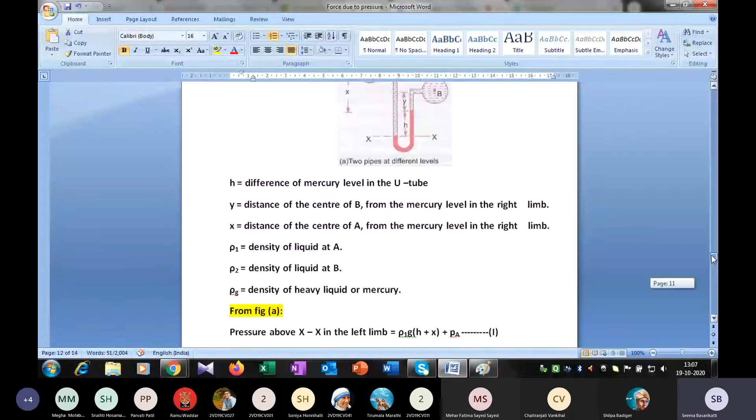This is the inverted U-tube manometer, the second type of differential manometer. In the U-tube differential manometer, it was somewhat like this, but in case of an inverted U-tube manometer, you can see the pipe will be in the inverted direction.

So these are the 2 points, point A and B. Here, in spite of a regular U-tube, it is an inverted U-tube. There is a point A and point B, and these are 2 vertical pipes connected to these points. The left pipe is connected to point A where you need to identify the pressure, and another pipe is connected to point B where you need to identify the pressure. This is an example of an inverted U-tube differential manometer.

In this case, there will be either two types of liquids or a combination of 3 liquids. The first liquid will be filled in the left limb, and again it is a combination of a heavy liquid and a light liquid. As you know, mercury is considered a heavy liquid. In almost all manometers, mercury is filled because its specific gravity is 13.6 and its density is 13,600, so compared to all liquids, mercury is considered the heavy liquid. So in this manometer, to identify the pressure, the liquid should be a combination of a light liquid and a heavy liquid.

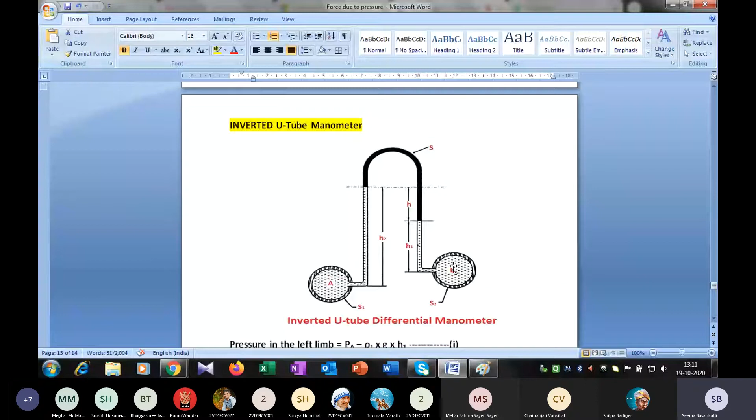For 3 types of liquid, let's consider water present in the left limb, in contact with mercury, and in the right limb it consists of oil. Suppose you wanted to identify the pressure of the oil and the pressure of the water - in this example, 3 types of liquids are present. So in the differential manometer, it contains either 2 types of liquid or 3 types of liquid.

In this condition, I am going to derive the equation. Let me consider the pressure in the left limb - I need to identify what is the pressure at the left limb, and the difference in pressure at A and B that I need to identify. Usually when we derive the equation, we start with point A, so I am going to take it as point A, PA, pressure at A.

While deriving the equation for the differential U-tube manometer, I take the positive direction. So if it is a U-tube differential manometer, then PA plus rho1 g h1, next PB plus rho2 g y.

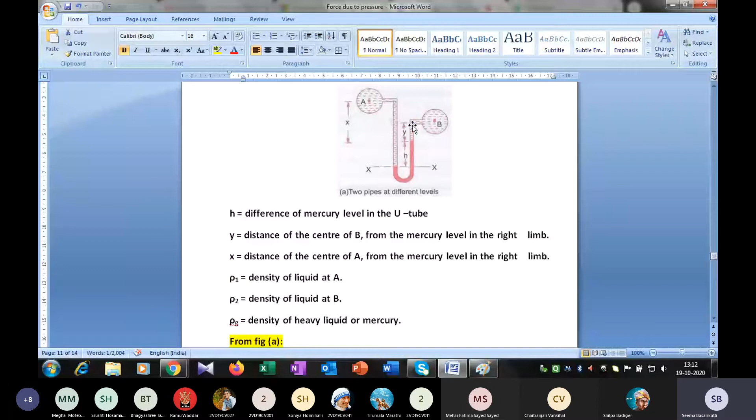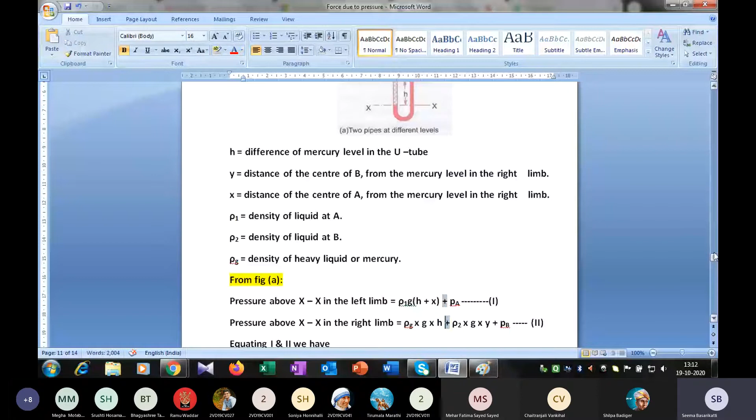This is the derivation which we have done in the previous lecture, where we used to take a positive sign. For a U-tube differential manometer, we need to take a positive sign. For an inverted U-tube manometer, we need to take a negative. That is the only difference between a U-tube differential manometer and an inverted U-tube manometer.

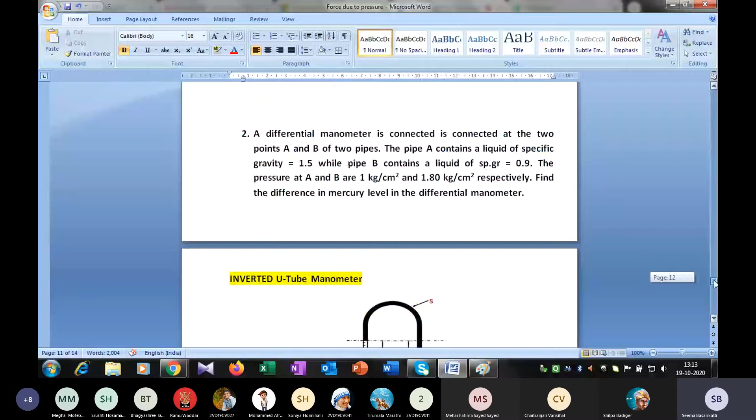In order to identify the pressure in the left limb, I am going to write the equation as PA, that is pressure at A, minus. Why minus? Because it is an inverted U-tube differential manometer. This is the first liquid I have taken, so rho 1 G, it should become H1. There is a mistake here, so while drawing, write this as H1 and take this as H2, and the rest remains the same. So PA minus rho 1 G H1, that is the height of the liquid up to the datum. I am going to take this as equation 1.

Next, forget about the left limb, concentrate only on the right limb. In order to make it easy, I am going to start again with PB. So this is PB minus, I can take this, that is rho G into H minus rho 2 into G into H2. This equation I am going to take as equation 2.

So in this case it is PA minus this, and in this case PB minus this. Either you can take this here if it's confusing, I can take this equation here: PB is in contact with rho 2 GH2 and then minus rho G into H. Only thing is, wherever there is a positive sign, you need to take negative for an inverted U-tube manometer. Now, this is equation 1 for the left limb and equation 2 for the right limb.

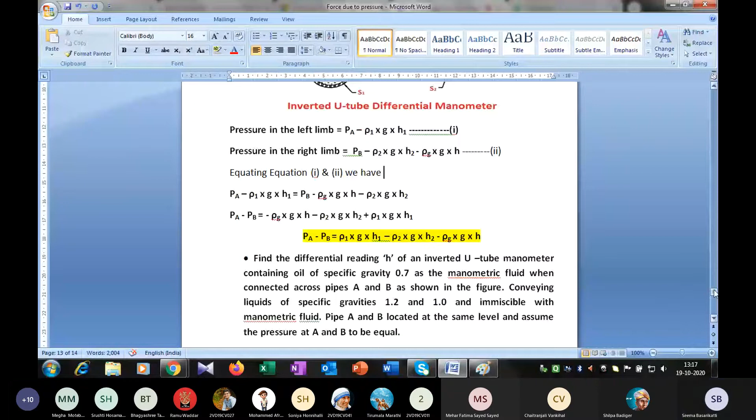In this particular diagram, make a slight change. Instead of taking H2, make it H1, and this one H2. Rest of the things are same.

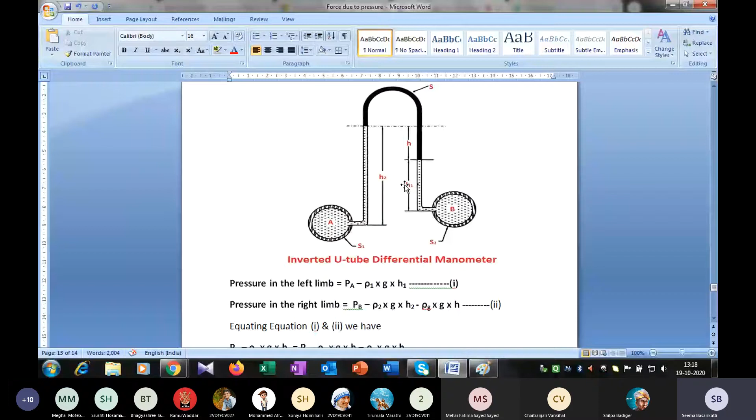Have you taken the equation? Okay, shall we solve a problem? Okay, take this problem.

Find the differential reading H of an inverted U-tube manometer. Whenever you are solving the problem, make sure whether it is a simple manometer, a differential manometer, or an inverted U-tube manometer.

Containing oil of specific gravity 0.7 as the manometric fluid, connected across pipes A and B, conveying liquids of specific gravities 1.2 and 1, immiscible with the manometric fluid. Pipe A and B are located at the same level, and assume the pressure at A and B to be equal.

So it is an example of an inverted U-tube manometer. It consists of three types of liquid, each having a specific gravity - 0.7, 1.2, and 1. And here they have given that pipe A and B are at the same level.

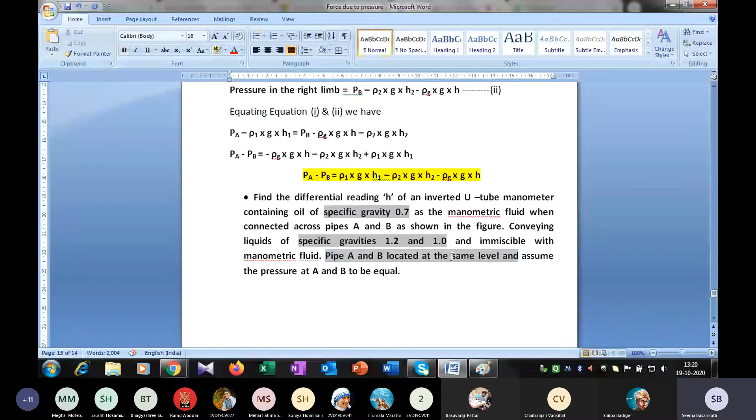So what does it indicate? Pipe A and B located at the same level - it is an example of this case, but the thing is that it is inverted.

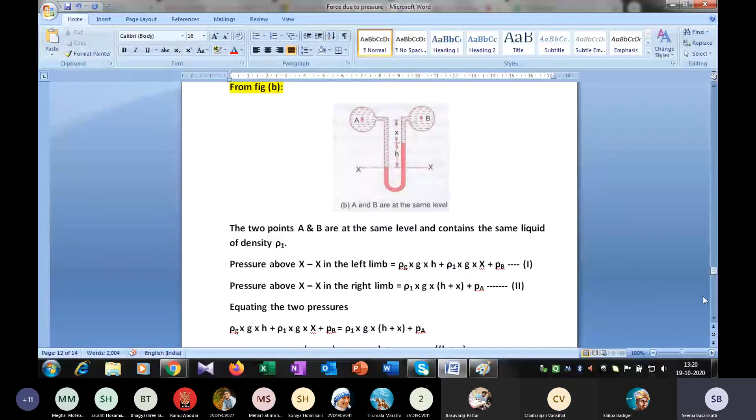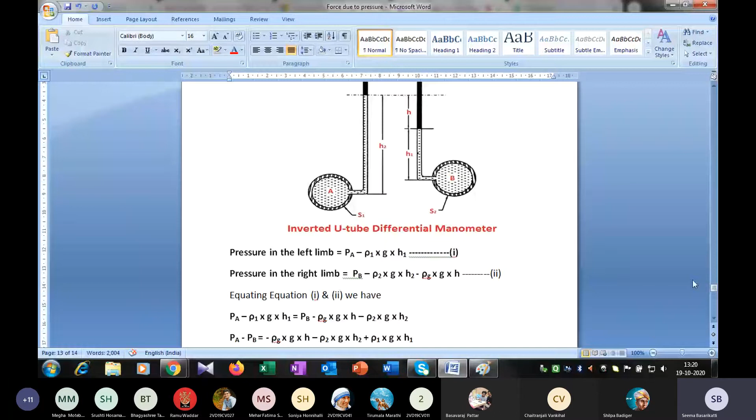If it is inverted and both points are at the same level, what will be the difference? I said that if these two limbs are at different levels, then there is a difference of this much. If they are at the same level, what will be the difference? If these two points are at the same level, it will be same.

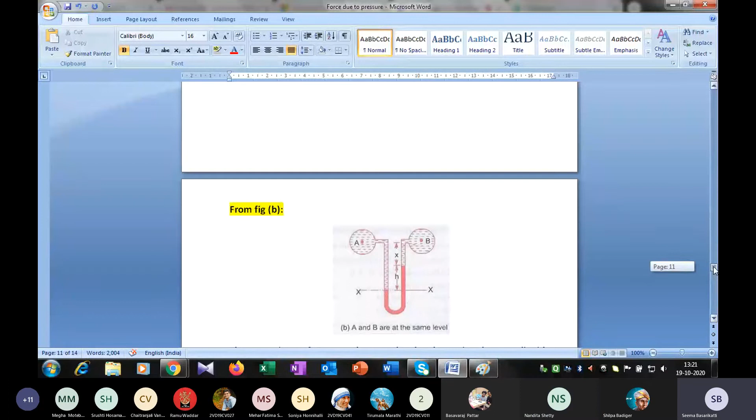That is, PA will be equal to PB. So that is the thing they have given here - assume the pressure at A and B to be equal.

Have you taken the problem? Yes. Take this diagram, the first diagram.

Here I can see point A and B are at the same level. This is the liquid with specific gravity 1.2, this is the second liquid with specific gravity 0.7, and this is the third liquid with specific gravity 1. So three liquids with three different specific gravities.

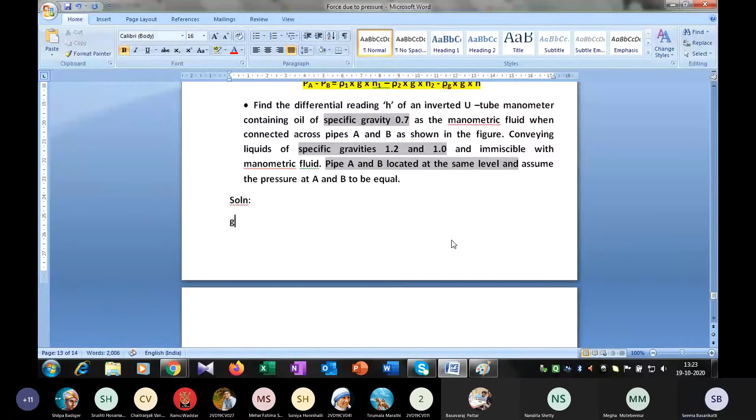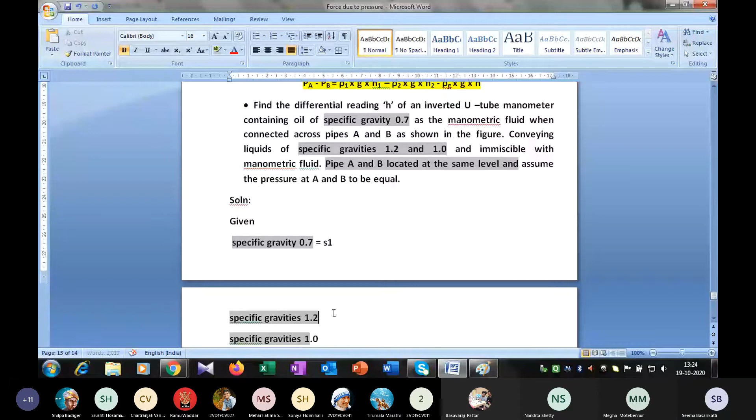Here they have given the specific gravity of the first liquid. Let me take this - write the specific gravity of all the liquids. So this is the specific gravity, let me take it as S1. And this is S2. And this is S3.

So if the specific gravity of a point is 0.7, then what will be the density? Density will be equal to 1000 into specific gravity. So ρ1 will be 1000 into 0.7, which will be equal to 700. Am I right?

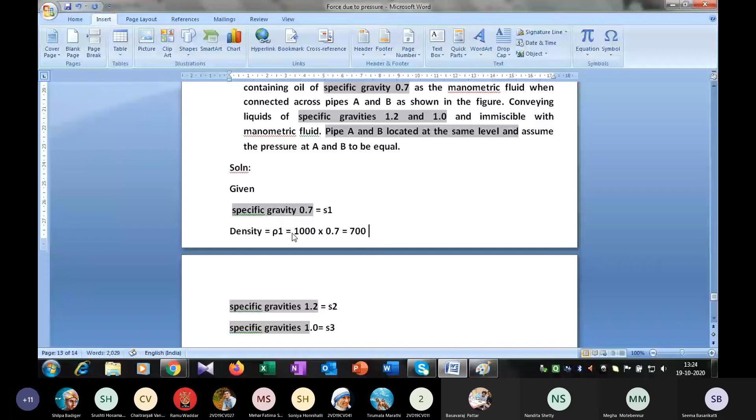Yes, ma'am. What is the unit? Kg per meter cube. Okay, simultaneously I am going to take this as ρ2.

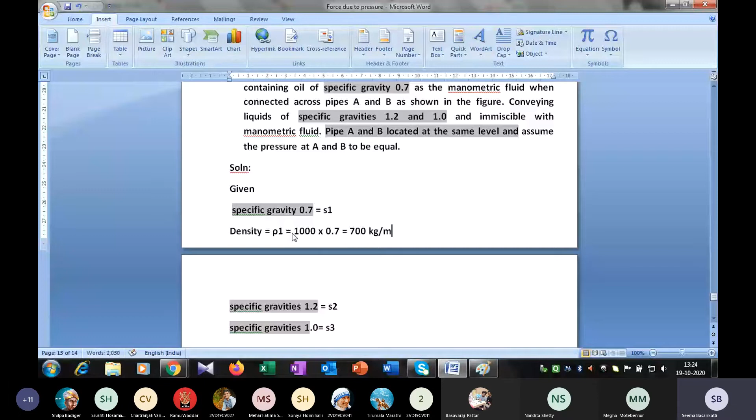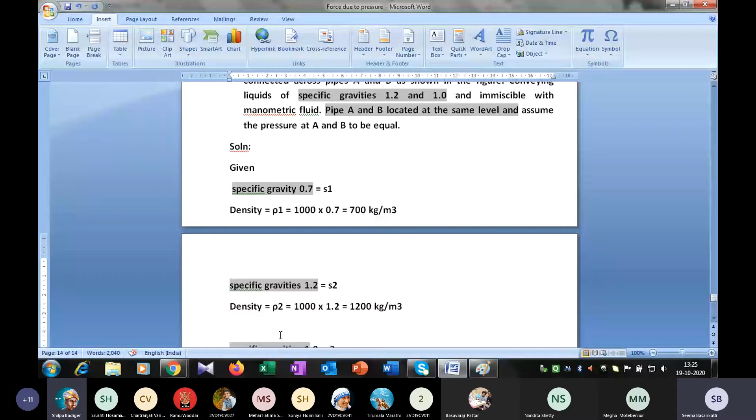So what will be the density? Is it 1200? Yes, ma'am. What about the third one? Third one is 1000, it is equal to 1000.

After that, write the equation. How are we going to write the equation here? So let me start from here - this is PA. Can anybody tell me how you are going to write the equation?

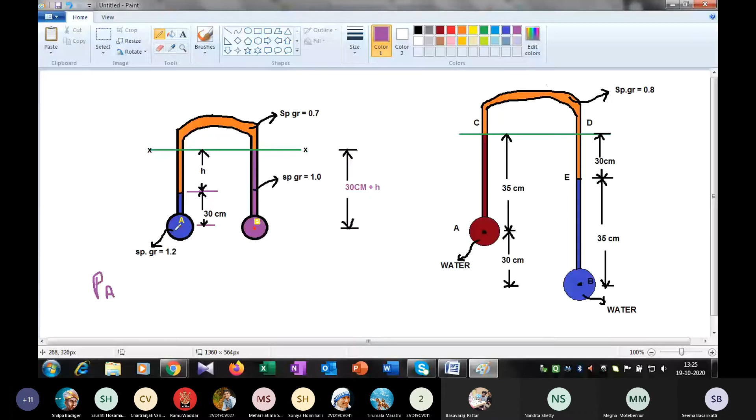I'm going to start with PA minus - so this liquid I have taken as S1. Is it S1? Yes ma'am. Okay, which is nothing but ρ1.

Now how are we going to write the equation for this first liquid? It is ρ1 into g into H1. Since H1 is in terms of centimeters, convert that into meters. So H1 is equal to 30 centimeters, which is equal to 0.3 meters.

Okay, simultaneously this is the equation for this particular one. And what about this? How are we going to write this, my dear students?

This is ρ2. So how are we going to write this equation? ρ2 into G into H2. This is equal to 0.

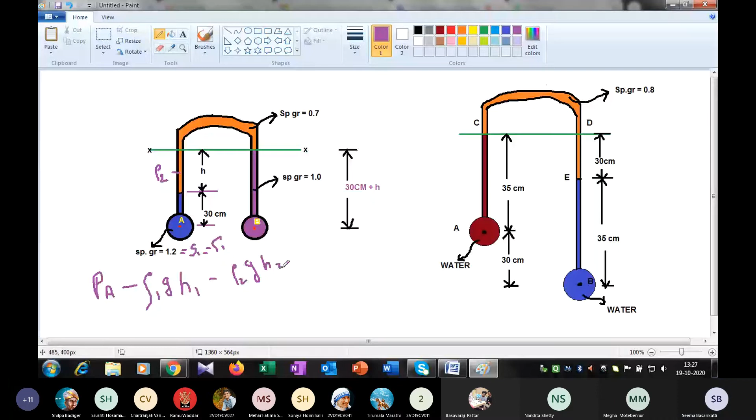So PA, I don't know, minus what is row 1 here? Row 1 is equal to how much? It is 1.2. This one I have taken as row 1 and this as row 2. So from this diagram, this is row 2 and this is row 3. Okay, this is S2 and this is S1.

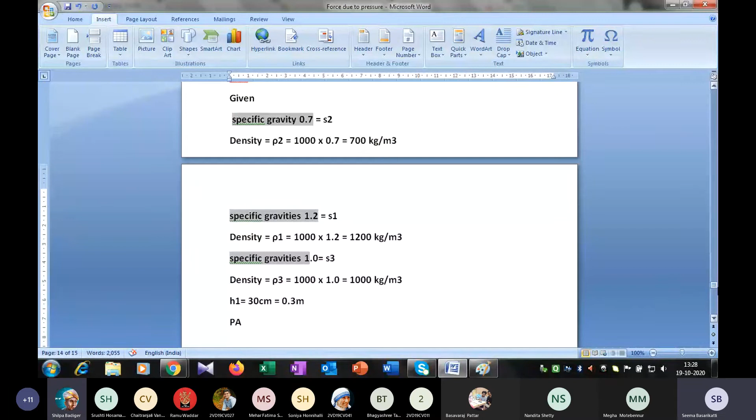Okay, so what about density? It is 1200 multiplied by 9.81, then multiplied by H1, that is 0.3. So here I am going to write the equation. It is PA minus row 1 into G into H1, minus

Varsha. Amok, Targal, please mute your speakers. It's not me, there is a lot of disturbance. It's not me, ma'am. Then who is it? Don't know, ma'am.

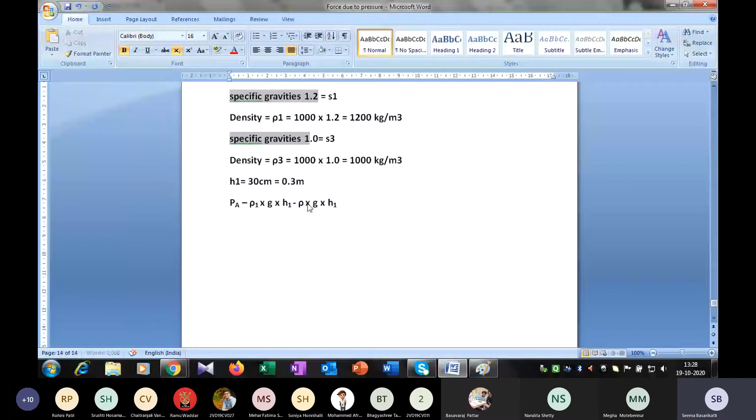See, there is a lot of disturbance. Okay, so let me take it as row 2 into G into H2. It is equal to 0.

Now go on equating the value here. This is taken as PA minus, this is how much? 1200 multiplied by 9.81 multiplied by what is H1 here? 0.3, minus what is row 2? It is 700 multiplied by 9.81 multiplied by, I don't know what the value of H is. Let me keep it as it is, equal to 0.

Simultaneously write the equation for the next, right limb. Okay, so let me take this as the right limb. So how are we going to write the equation for the right limb? This is row 1, row 2 and this is row 3. Okay, so the equation will be PB minus row 3 into G into H3. It is row 3 into G into H3.

Now go on equating the value. PB will remain as it is minus what is row 3? Is it 1000? 1000 into 9.81 into what about H3? Right, H3 is equal to how much? Fast. 0.3, H plus 30... H plus 0.3, ma'am. Yes. H plus 0.3, which is equal to 0.

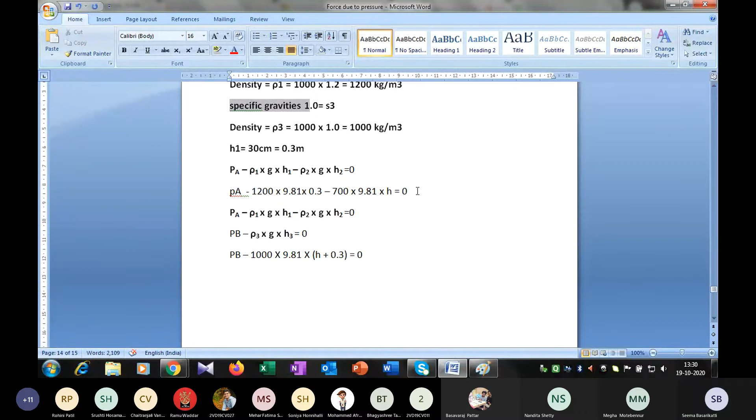Now equate 1 and 2 and tell me the answer. Let me take it as 1 and this as 2. So equating 1 and 2, tell me the answer.

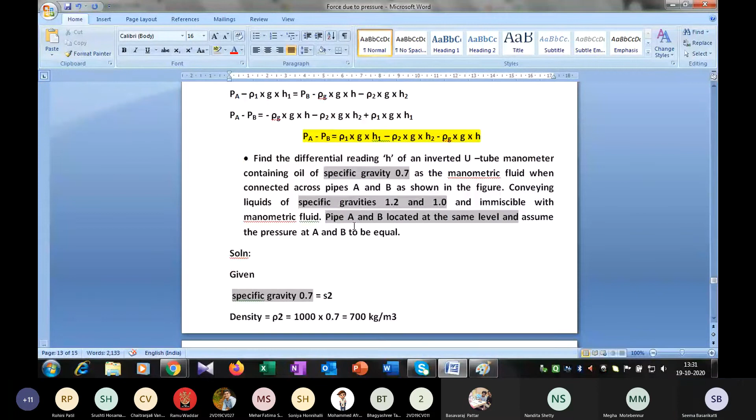So since it has been already given here, PA is equal to PB, pressure at A is equal to pressure at B. So here I can write it as PA is equal to PB. So therefore this term is going to cancel, because both are equal.

So now tell me, what is 1200 multiplied by 9.81 into 0.3? Ma'am, 3531.6, ma'am. Which is that answer, this one? Yes, ma'am. How much it is? 3531.6. Is it correct? 3 0 is not there, ma'am. 3531, ma'am. Okay fine, minus.

Minus. Okay, what about this? That is 6867, ma'am. 700 into 9.81, 86 is 7, 86 is 7 into H. Okay.

Come to the right hand side. It is 1000 into 9.81, that is 9810 into H minus 9810 into H. Minus into plus is again minus. So into 0.3 is equal to how much?

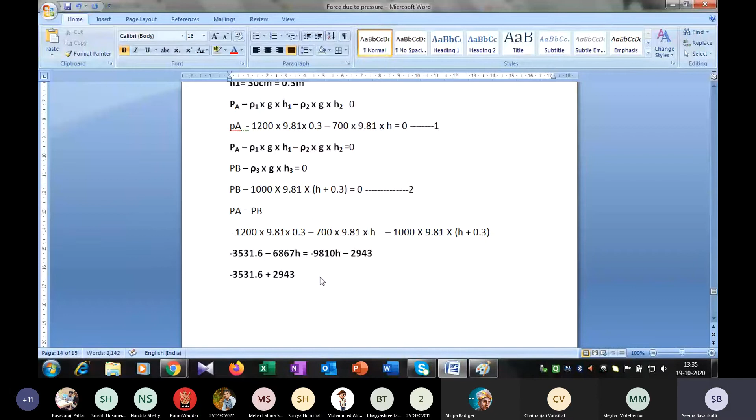So which is equal to minus of 9810 times H plus 6867H. So the answer for this is minus, it will come 588 something. So finally you are going to end up with the equation which is equal to 0.2 meter or 20 centimeters.

So this is the answer to calculate H. Okay, hope all of you have got the same answer. Yes, ma'am. Okay, what about others? Is there any doubts? No, ma'am.

So only thing, it depends upon the equation how you are going to write. Okay, shall we move for the second problem? Yes, ma'am. Okay, take this diagram. So from the diagram itself, we can derive the equation and you can solve the problem.

So here point A and point B are not at the same level. In the first condition, point A and point B were in the same line, so therefore PA and PB are going to cancel. But here it is not so, point A and point B are at different levels. Take this diagram and solve the problem. Tell me what is the difference of pressure at A and pressure at B.

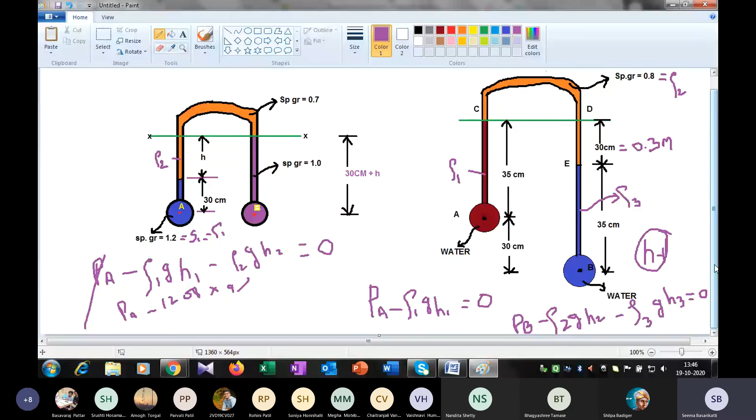What is the answer? PB minus PA.